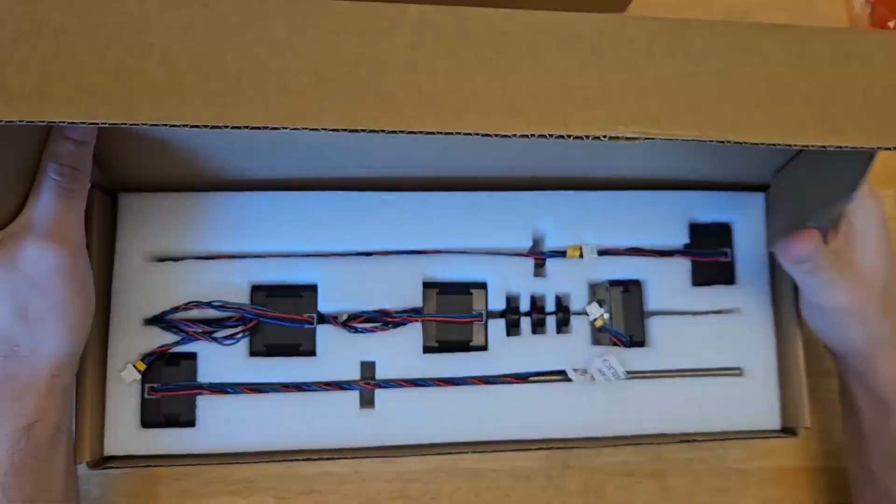Most parts are shipped in categorized boxes. I figured my best course of action was to separate each of these boxes, then open each and sort the bags inside. It's all nicely labeled, so it was easy to sort the X-axis, Z-axis, electronics, Y parts, and so on.

I built a Mark III kit years ago, so I'm familiar with the basics, so I skipped over the beginning of this instruction manual. Now we're onto the frame. For each step, they tell you what hardware and parts are going to be used, so I try to get those out in advance.

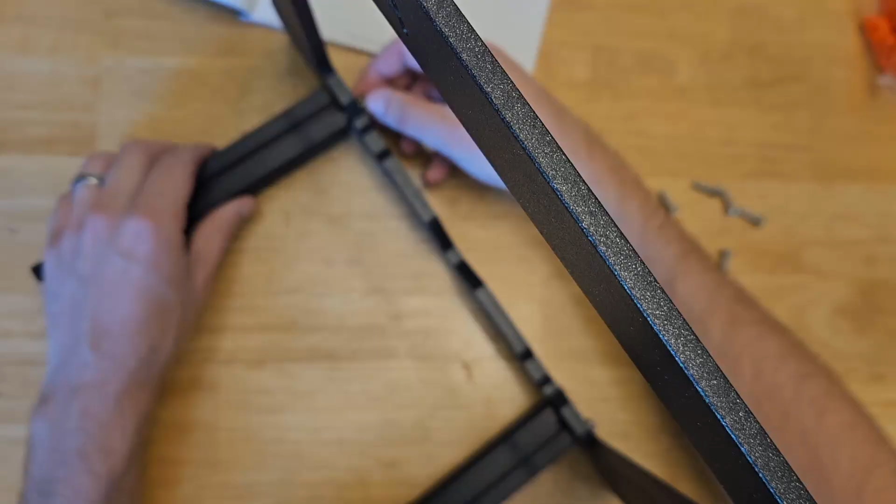The first step is attaching the base onto these vertical frames. I somehow messed up this first step and put these in the wrong spot, so let me take those off and correct them. Now we can get to the shorter legs.

As with almost any assembly, using a star or diagonal pattern is a must. Get all of the pieces mostly tightened, then go back around in a crisscross pattern for final tightening.

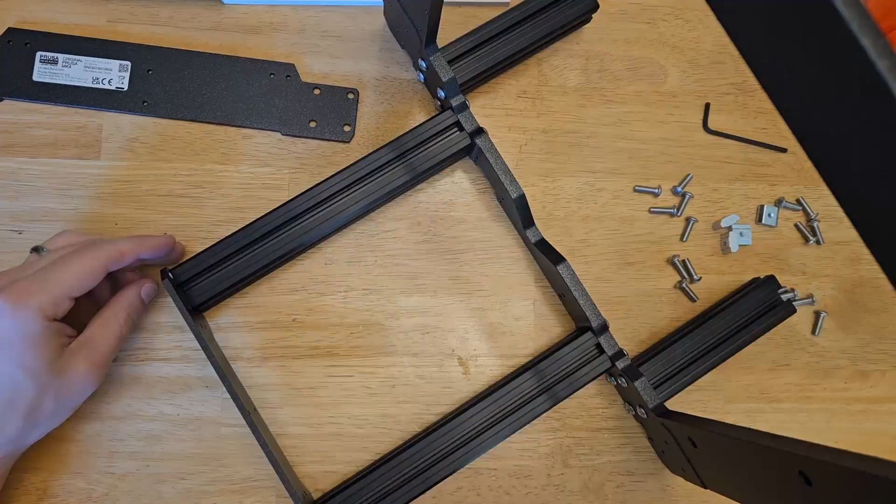The next step is installing square nuts that slide along the side of the extrusions. They only fit in one direction, so they're easy to slide in. We can then go ahead and add the end plates - the short one and then the long one.

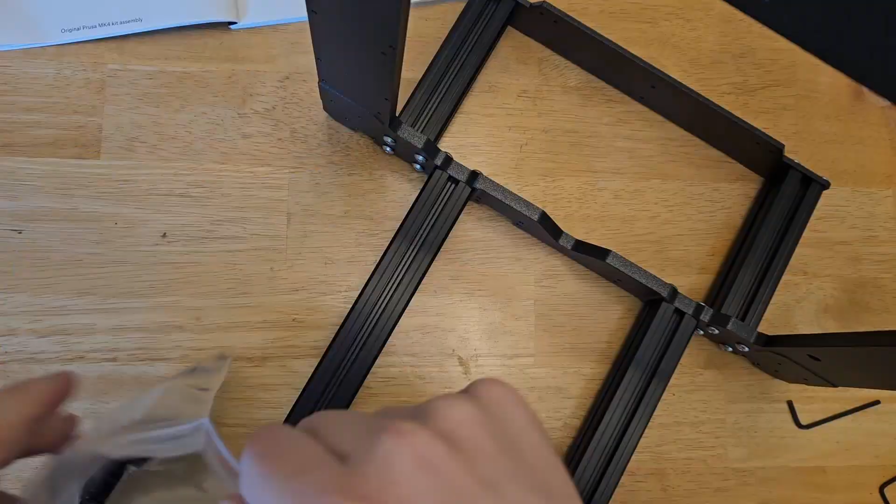Up next are some rubber feet, which should help dampen some vibrations. We push them into place and rotate 90 degrees to lock them in.

These cable clips are next, and man, they gave me a hard time. It's much nicer than zip ties, but I really hated these. You put one side in place and then press hard, like really hard, to snap the other side into place. I'm guessing one of the reasons I hate them is because, even though we've just barely begun, I've already made another mistake - I put these on the wrong side and had to take them off to redo it. Luckily, the pictures in the guide helped me catch that pretty quickly.

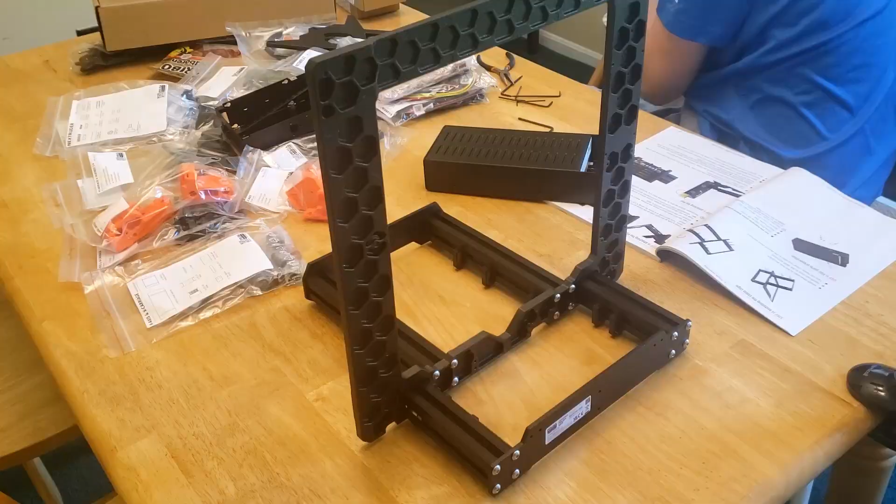From here, we add the PSU. Some screws get added to the sliding nuts we put in, and then the PSU slides into place over top of them. It can then be screwed into the vertical frame and tightened down, both from the frame and from the sliding screws.

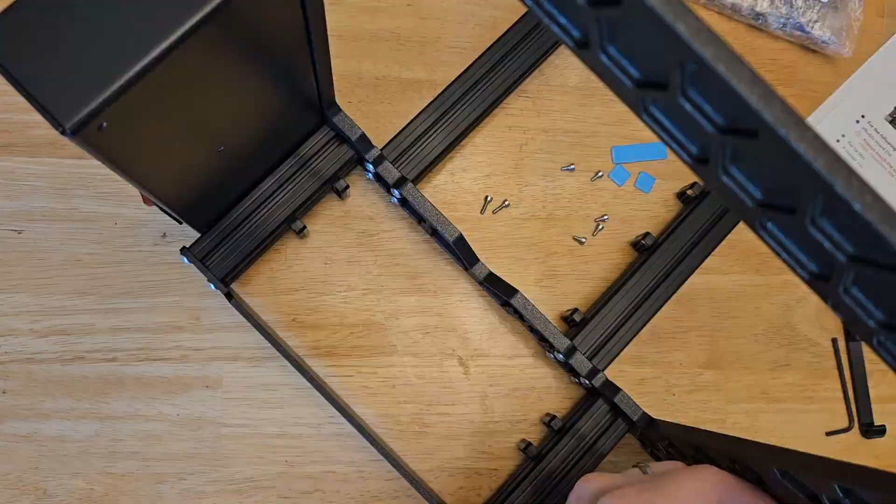Next is the so-called xBuddy box that holds the xBuddy board, or the main circuit board. We begin by installing the box to the other side of the printer, basically the same process as the PSU, where you put it on the sliding nuts and then screw it into the frame.

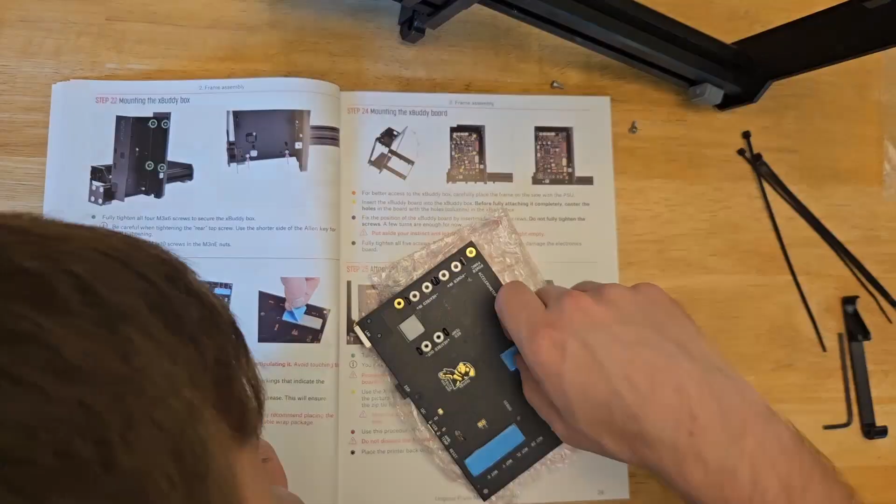We can then add some thermal pads to the back of the board, flip the printer on its side, and place the board down in place. It then gets attached by 5 screws.

At this point, we get out the X-axis holder, which is used later in assembly. It was designed with a special curve to help guide some zip ties into position around the buddy board. While we don't really need the zip ties until quite a while later, I guess they figure you might as well add them now.

As a side note, our cat loved playing with them while I was between build sessions because they're just sort of sticking out the side.

After getting the printer back upright, we can look at the Y-belt idler. We push a nut into position and then we screw it down to the frame.

We then move to the Y motor. A few nuts get pushed into the motor holder, and then the holder gets screwed to the motor. From here, we attach the drive pulley.

Using an Allen key, we can place the pulley at the right spot before tightening the grub screw. As a warning, I actually had this pulley flipped upside down, and I'll fix that later.

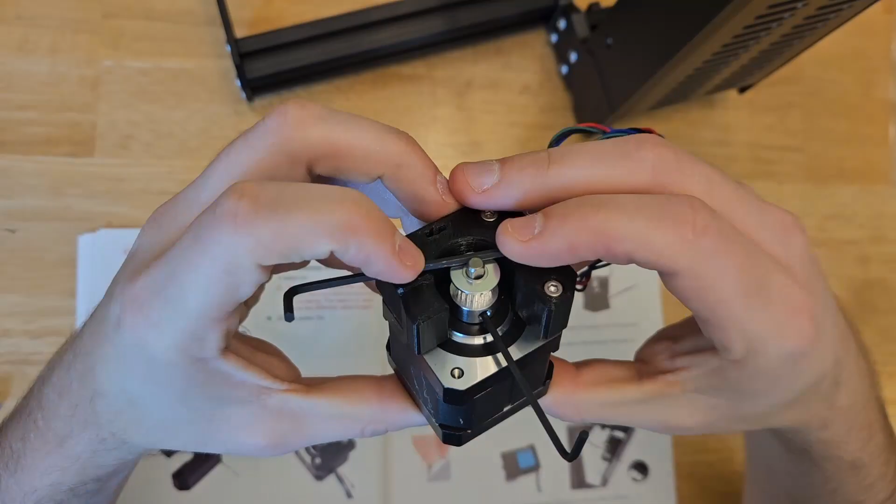With the thermal adhesive in place, which I assume just acts as a shock absorber, we can screw the motor into the frame. And there we go. The frame is basically done. In total, that took about an hour and 40 minutes.

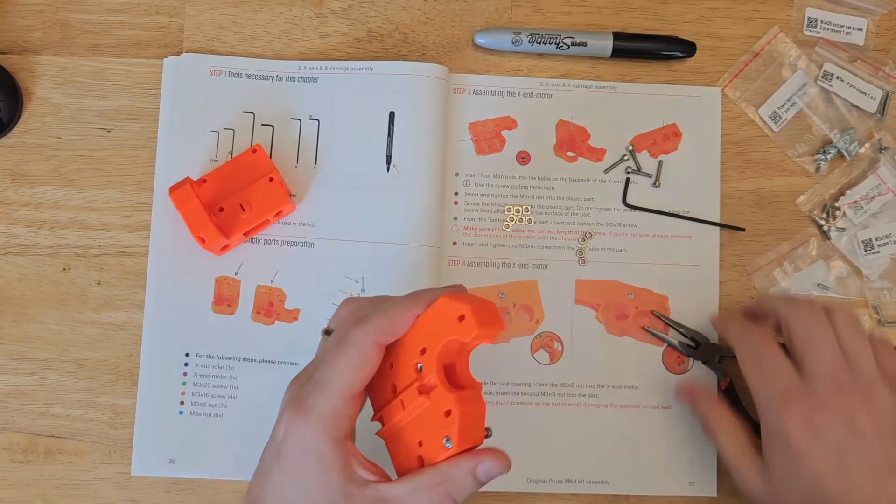With the frame fully assembled, we can now hop into the X-axis. We begin by getting the X-end idler and the motor mount. These have a ton of nuts that need to be inserted. By this point, you're hopefully pretty used to the various techniques to use to insert them.

Now let's get out some bearings and their clips. The bearings in this kit need to be lubricated, so there's an included tube and some adapters. Here we're going to use the larger black adapter. It screws onto the tube, is pushed into the bearing, and rotated into position so that it pushes lube out of some tiny channels onto the ball bearings.

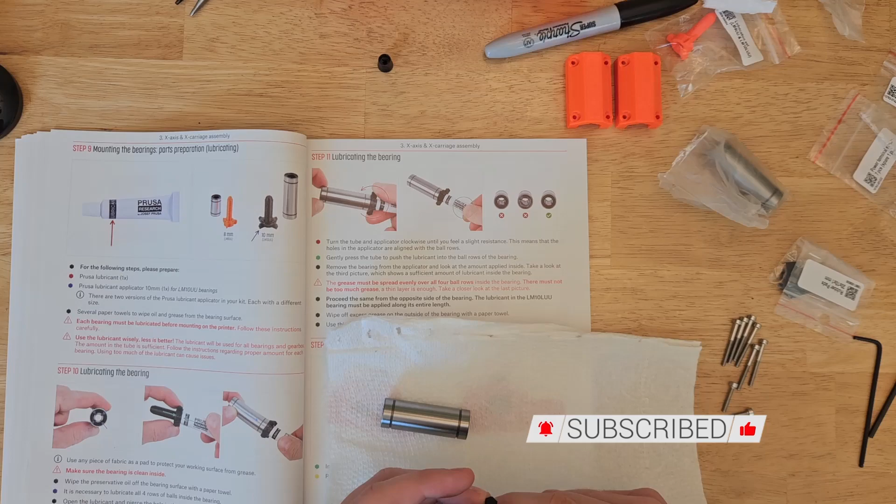It seems to work okay, but it's not really the most elegant process. I feel like this is something that could probably be improved in the process later.

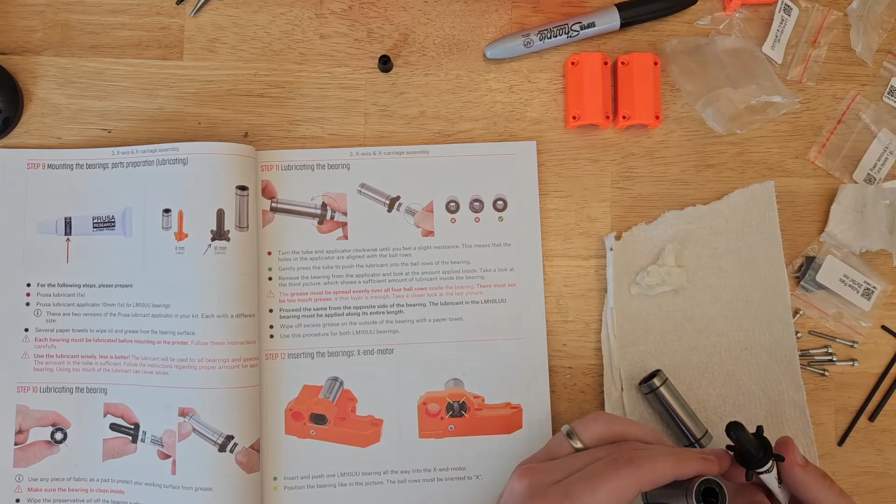After doing this for both bearings, we look at clipping them into place. We place it in the motor mount and rotate it so that the ball rows are aligned properly, and then a rubber pad is put in this cover to help the bearing from rotating. The lid is then slid over the bearing and tightened down. As usual, it's tightened in a diagonal pattern.

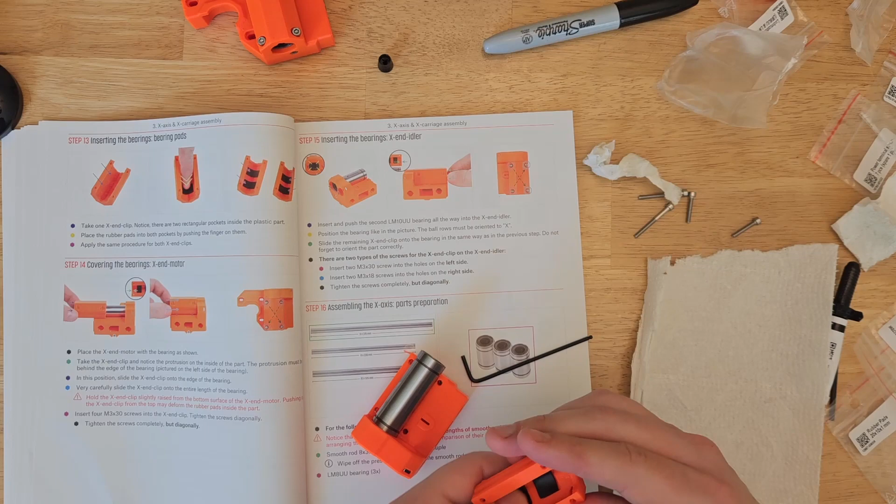This process is then repeated for the X-idler mount. We put the bearing in place, get it oriented properly, slide the lid over, and we tighten it down with the X pattern. Next up, we take the 2 longest steel rods and 3 of the shorter bearings.

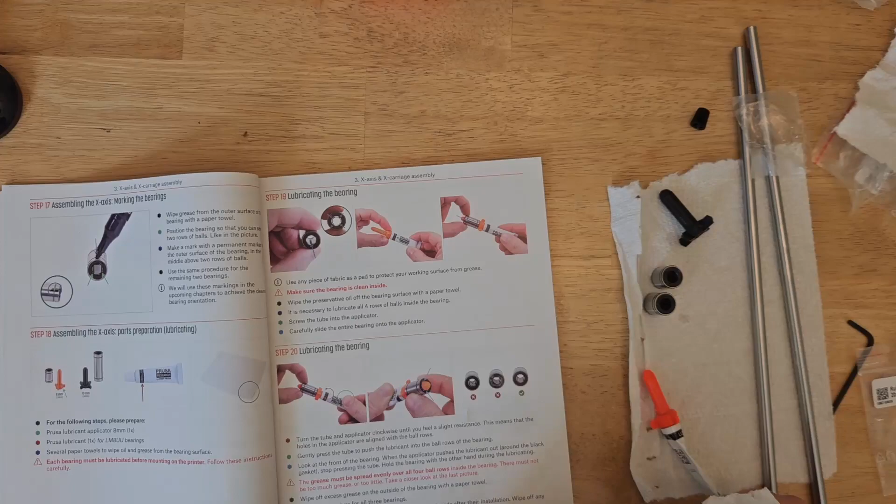These get marked to help us remember the orientation of the ball bearings. Then, basically just as with the previous bearings, they get lubed up, this time using the smaller orange adapter. We can then push the 2 rods into the X-end idler.

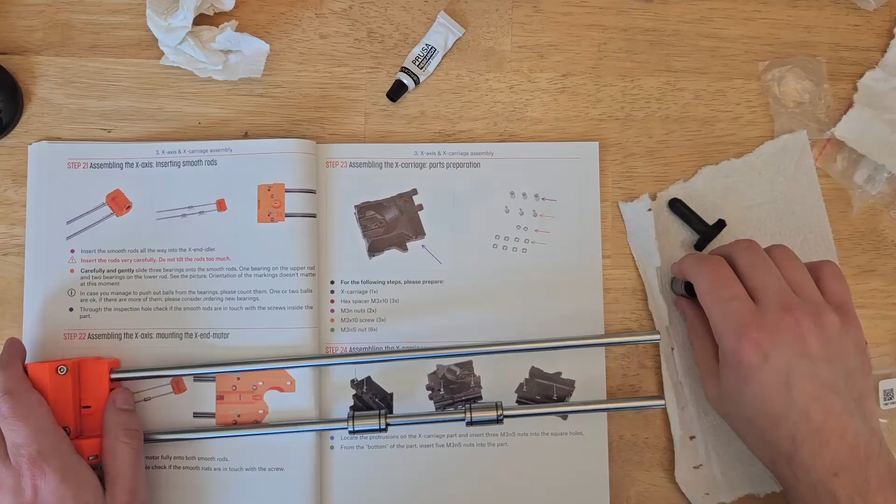It takes a bit of force, but pushing on the table worked out pretty well. The bearings are then slid into place, but make sure you note the direction and orientation, like you put 2 bearings on one side and 1 bearing on the other. And with those on, we can slide the X motor mount onto the other side of the rods.

For now, the X-axis can get set aside and we move to the X-carriage. Again, we have a ton of nuts that need to get embedded in this one. Just use the Allen key with various push and pull methods to get them in place. And after that, we'll add a few hex spacers as well.

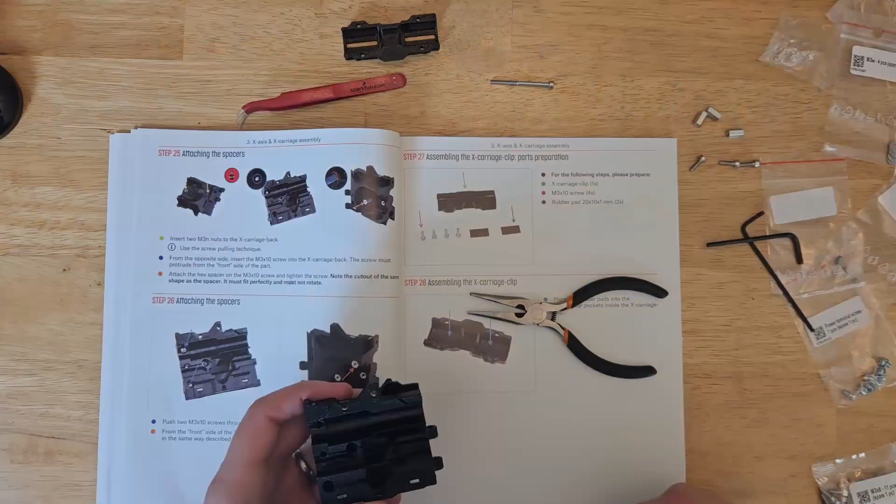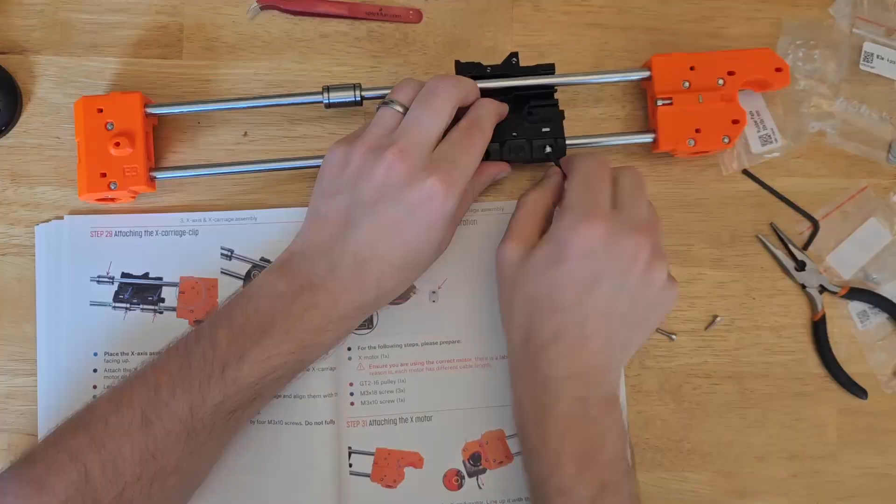The carriage clip is next and receives a few rubber pads. Just as with the other pads we use, these will help hold the bearings in the right orientation. With those pushed down into place, we'll spin the bearings so that they're lined up properly, and we'll put the cover on to tighten the screws.

Next, we grab the X-axis motor. This gets mounted to the motor mount, similarly to the Y motor. Use the Allen key to align the pulley, and then tighten down the grub screw.

From here, we get the idler pulley and the X belt. With the belt wrapped around the pulley, we can pull the pulley into the idler and slide and push a pin through it. Man, I said pull and pulley a lot there. By pulling on this belt, the pin seats into place.

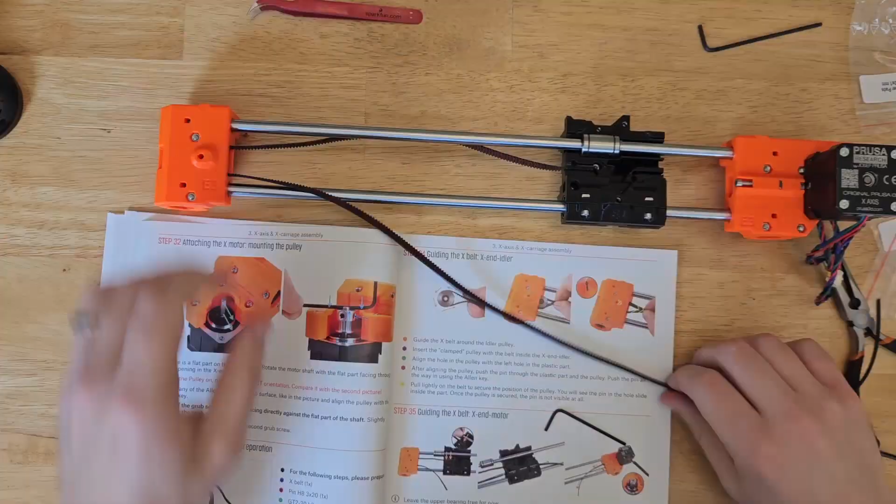Now we'll push one end of the belt into the carriage. I like to use an Allen key to get it fully seated in there. The other end gets passed through the carriage, wrapped around the drive pulley, and then back to the carriage. It can then be pushed into place.

Don't worry about the tension right now. It should be somewhat tight, but it gets fully tightened later. The last step for this X-axis is to fully tighten the carriage clip into place.

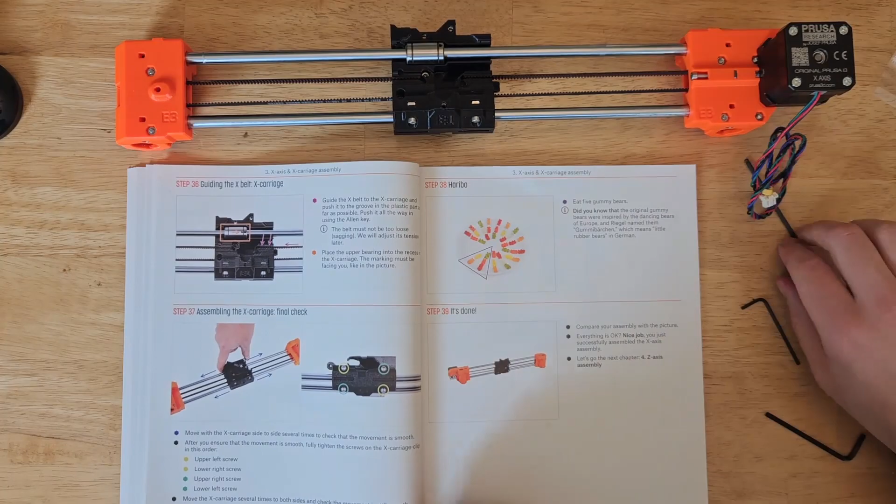And bam, the X-axis and carriage are complete. That took about an hour and 45 minutes, bringing us to a total of 3 hours and 25 minutes. With the X-axis all assembled, let's go ahead and start grabbing some parts for the Z-axis.

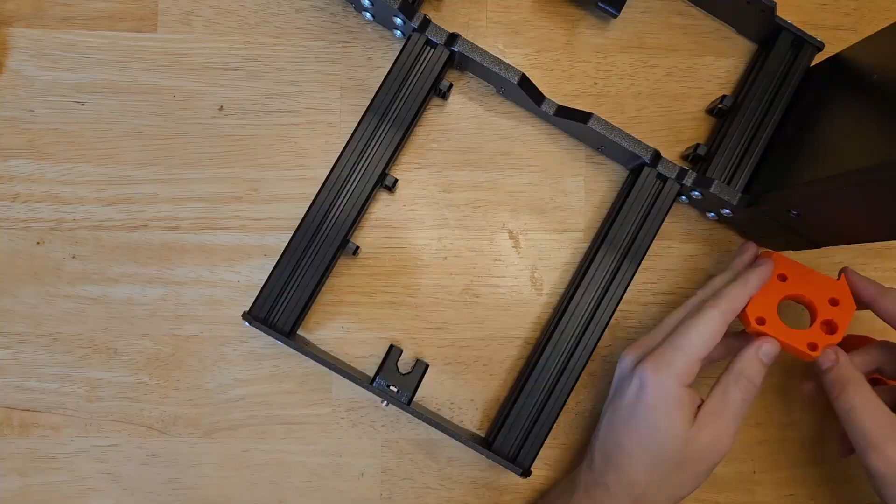We're going to start with the bottom left and right brackets. Using a few screws, we'll screw them into place. There's a little lip on the side to help ensure that they fit into the right spot and to make sure that they're on the right side.

Now we can get out the Z motors and the attached screw drives. We'll also need to add some rubber pads at this time. There's a few plastic nuts in this box as well, and they recommend putting them aside so you don't lose them. The motors get mounted to the underside of the mounting brackets.

The longer cable should be on the side opposite of the buddy board. The rubber pads are placed over the motor before we screw them down. At this point, we can tighten them most of the way, but we need to leave a little slack for some of the next steps.

First though, we'll feed the wires into place, under the frame, and up to the buddy box slots. Now those trapezoidal nuts come into play, along with 2 more metal rods.

This time we use the 2 shortest, which are also the largest in diameter. We'll go ahead and push them down into place. There's even a little viewport in the motor mounts to help make sure that they're pushed in all the way.

From here, get the X-axis assembly and slide it down over the rods. The plastic X-axis holder now comes into play, used to hold the assembly up near the top of the printer. With this held up here, we can see how the threaded rods stick up through the X-axis brackets. It's up near the top, so any small changes in angle cause a large amount of movement.

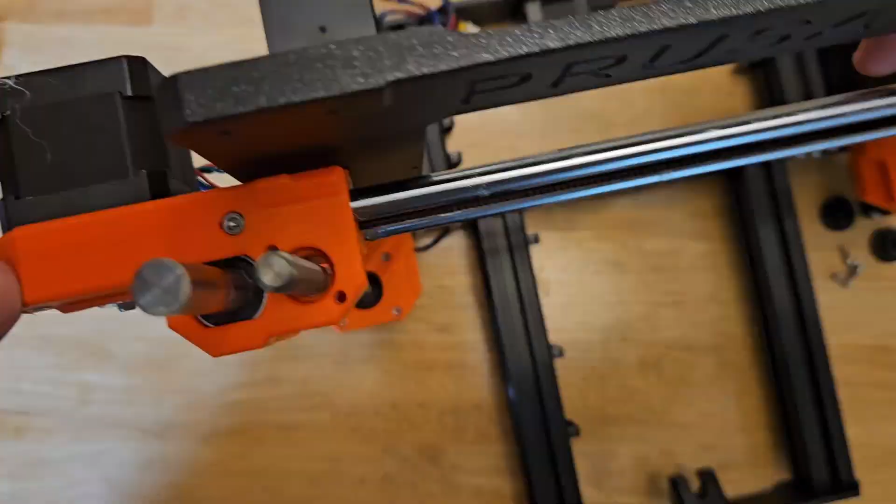This gives us the opportunity to tighten the Z-motor screws. We want to get them nice and tight, but we may need to back off slightly on some of them to ensure that the screw is centered in the hole.

We can now move on to screwing in the trapezoidal nuts. They screw onto the threaded rods and down into the holes on the X-axis assembly. Tightening the screws down on these nuts now locks the Z-axis height to the X-axis assembly.

So really, we can remove the X holder if we want. I mean, I didn't. I probably should have, but I waited until a little bit later.

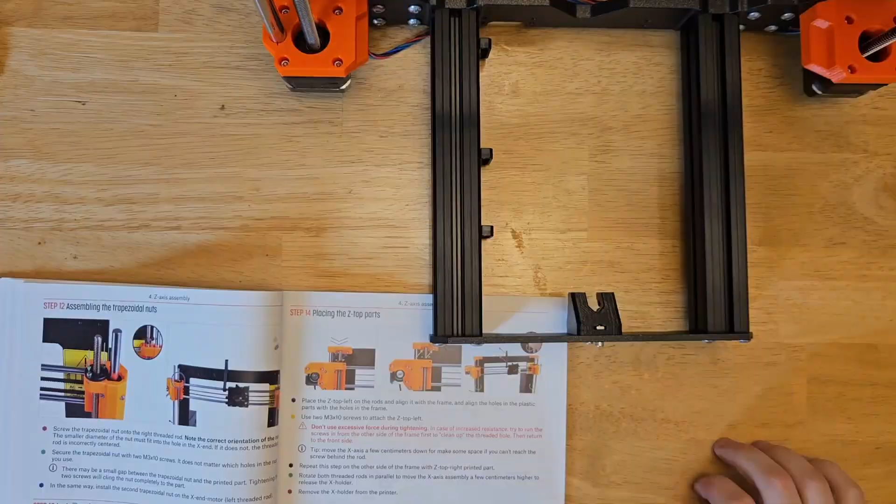Up next, we have a couple end caps that go over the Z-rods. These go over the top and screw into the frame. I had a bunch of trouble with one of these, so I put a screw in from the back to ensure that the frame was threaded out nicely.

Sorry about some of the camera angles. I should have used a wide angle option on the phone, but again, assembly was priority, not recording.

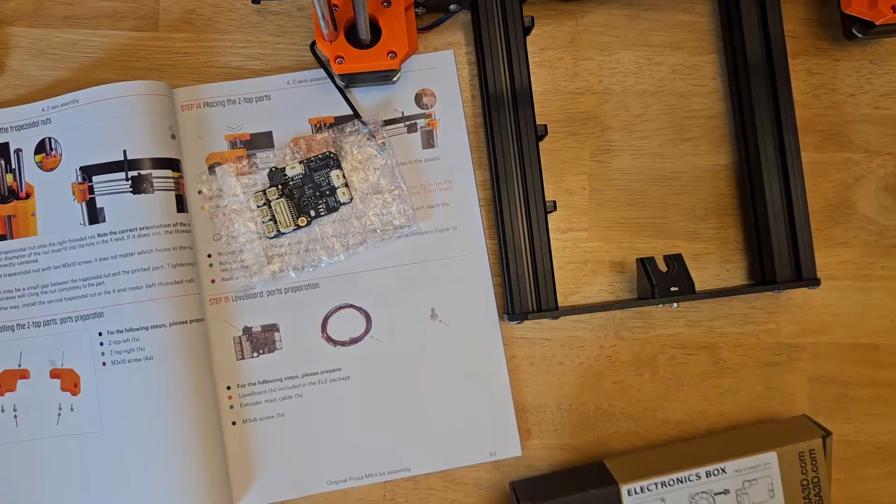With this assembly all in place, it's time to hook up some of the controls for the X-axis. We'll need to go to the so-called LoveBoard, and also this large extruder cable. The cable gets passed through the axis and up into a channel in the carriage.

We then plug it into the LoveBoard, and then we push the LoveBoard down to its slot on the carriage. From there, it gets screwed into place, and I do a bit of cable management.

Okay, so now we want to set up some parts so that the cables can feed from the LoveBoard down to the buddy box. We start with a large screw going through this cable holder.

Next we grab the nylon strand and this back cover. We'll go ahead and place one of the rubber pads onto this back cover, which will prevent the bearings from rotating. And now the nylon gets pushed through the little hole to hold it in place.

After ensuring that no wires are pinched, the back cover can be screwed on and that bearing can be held into place. I didn't quite have one of the inserted nuts on the carriage pulled in all the way, so my screw didn't quite reach. Luckily, I could just use one of the longer ones to pull it tight, and then go back with the correct screw.

From here it's a part I always hate for some reason, using the cable sleeve. We'll use the largest of the three cable sleeves and wrap up this bundle of cables. After getting it started, this cover gets placed on and zip tied down. Spoiler alert, these zip ties gave me some trouble later. Make sure they're tight and rotated properly.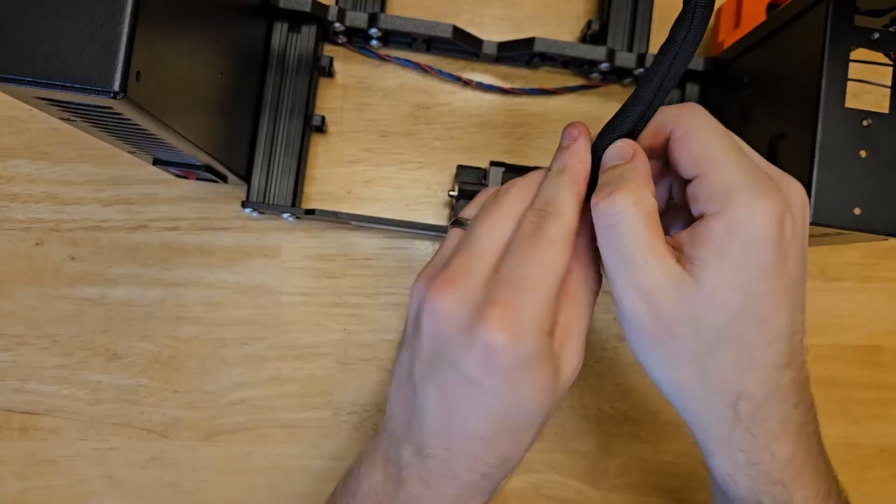So from here we just finish wrapping up the sleeve, and after grabbing a few other parts, it's time to wrap up the X motor cable, which is much shorter and easier.

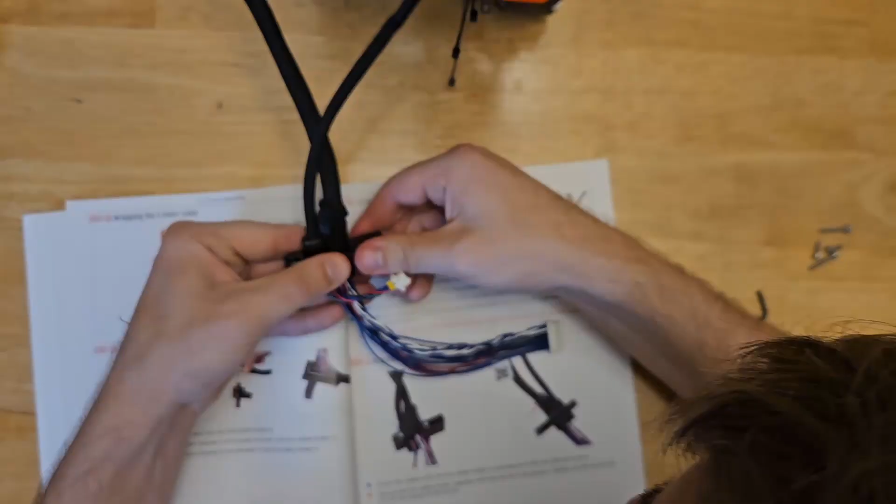Now it's time to move on to this cable holder that brings the newly sleeved cables together. We'll push a few nuts in, then use the nylon to lock the larger bundle into place. Next, the smaller bundle gets passed over top and placed in its spot. From here we can screw down the top of the cable holder, which clamps down on the sleeves and keeps everything in place.

A zip tie is then used to clamp down further on one of the extensions, and honestly I'm not entirely sure why that was needed. But now we can slot this into the xBuddy box and tighten it down. The cables are left unattached for now, and with that, the Z-axis, and I guess the X-axis wiring, are completed.

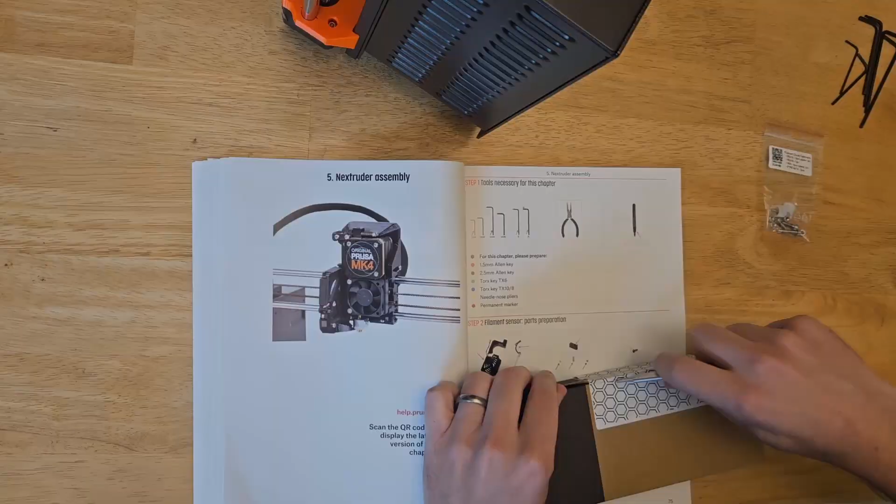That took another hour and 45 minutes, bringing us to a total of 5 hours and 10 minutes so far on the build. Alright, with the X-axis and Z-axis all assembled, we can begin on the Nextruder. The printer can be set aside for now, as we'll be focused on this sub-assembly for a little bit.

We start with the filament sensor assembly. I wasted so much time here searching for this steel ball, which turns out it was just in a different bag than what I was expecting.

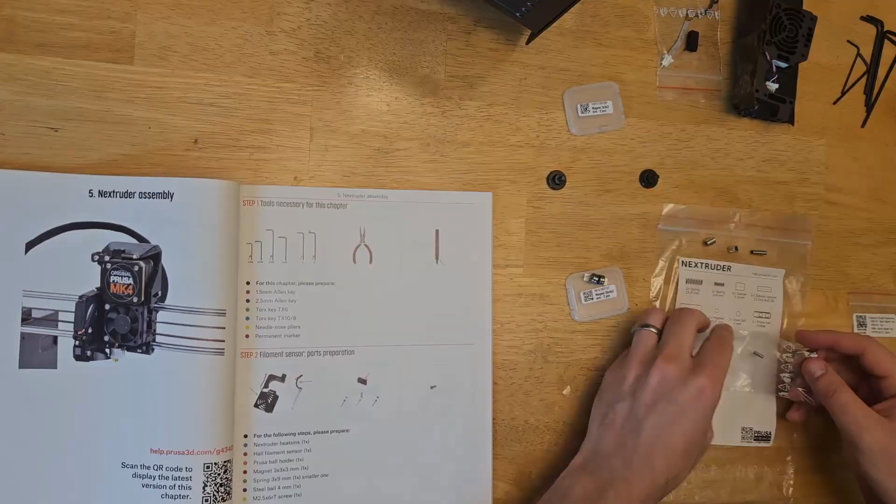Okay, so with all the parts in place, this filament sensor gets screwed into place on the heatsink. We can then assemble the spring-loaded ball that assists the sensor. The ball gets stuck to a magnet, which then gets put on the spring. This assembly is then pressed into a slot on the heatsink.

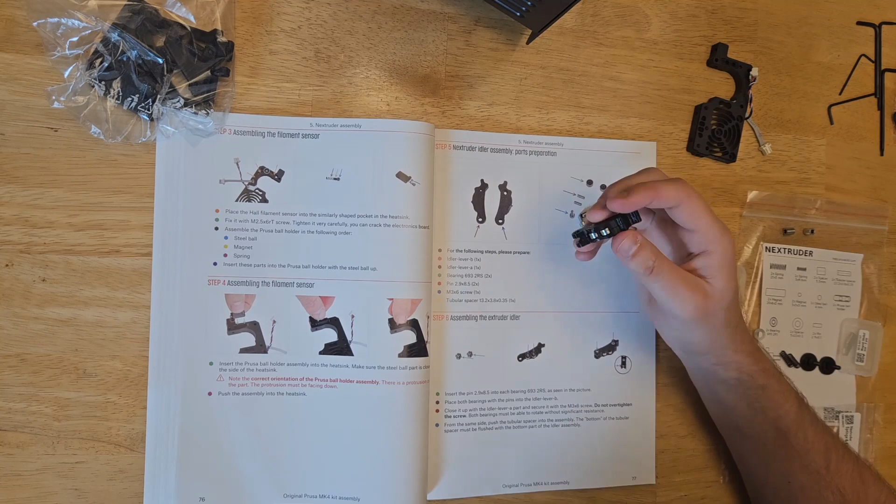We can set that aside for now and start grabbing parts for the idler assembly. This is just two small bearings that get sandwiched between the two halves of the idler lever. When tightening it down, we need to make sure the idler bearings can still spin freely, so don't go too tight. The spacer then gets pushed on one end, which will basically act as a pivot later.

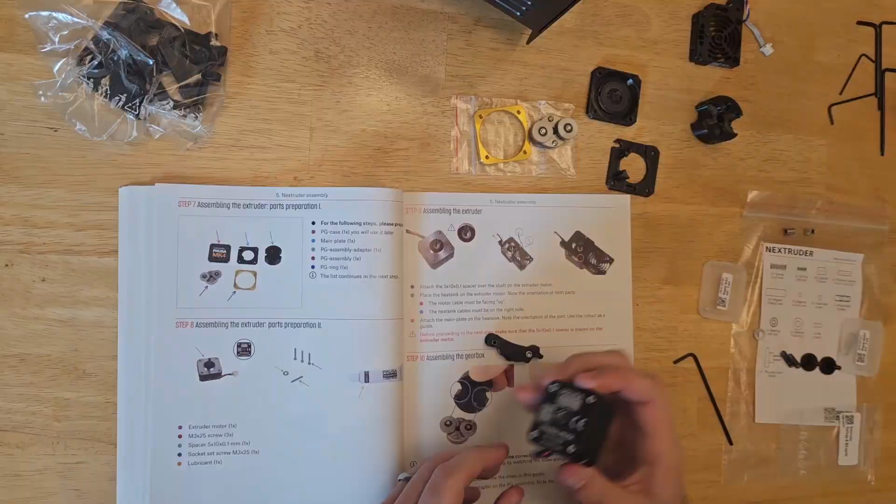Okay, so now the main extruder part. We'll need the planetary gear, the housing, and the motor. The heatsink gets placed on top of the motor, and then this plate gets set on top.

We can then take the planetary gearbox assembly adapter, and we use that to pick up the gearbox. The adapter is basically just a specialized printed part to help with alignment. With it picked up, we can now press it into place.

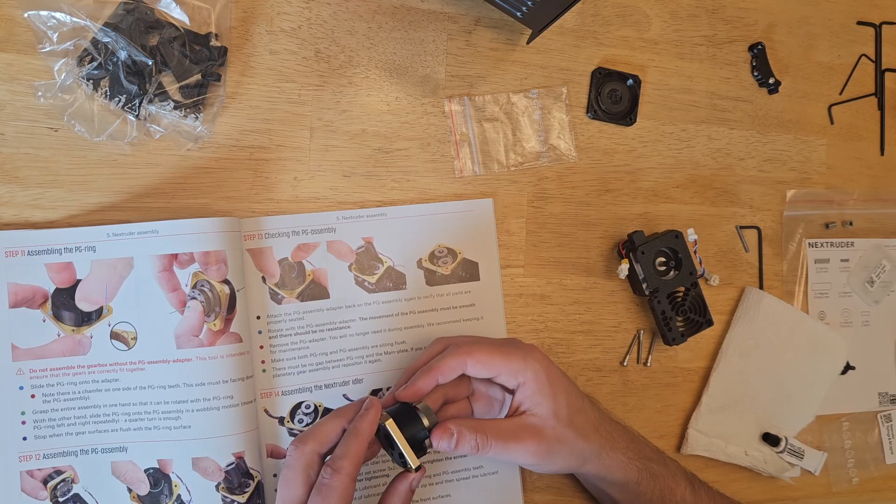This step also took me much longer than it should have. I was just trying to be overly cautious, I think. Also, the lighting I was in made it really hard to see the chamfered edge on the ring, and I feel like they probably could have marked that ring a little bit better.

Eventually I got it on, about 10 minutes later, and I placed it on the motor. The guide was adamant about making sure it was aligned properly, so I actually took it back off and did it again just to be safe.

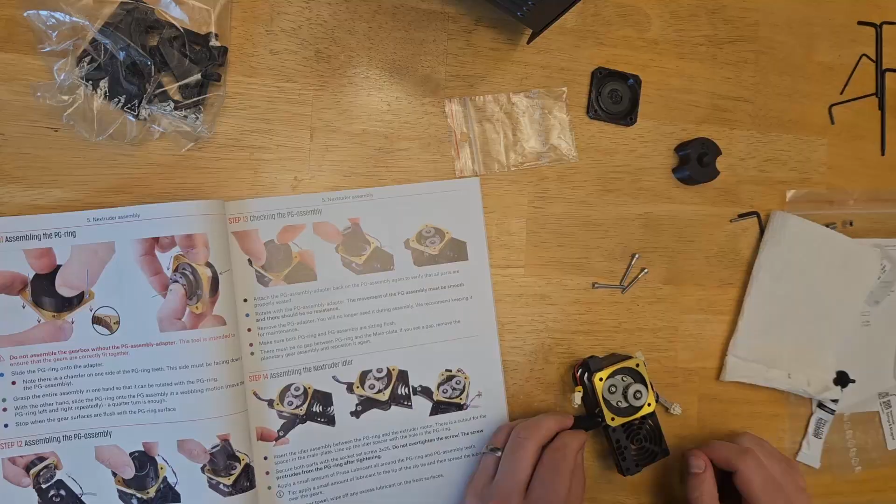From here, the idler gets added and the screw is inserted. Next, it's time to lube up the gearbox. I used one of the small Allen keys, but it actually recommends using the tip of a zip tie. Basically, just go around all of the teeth of all of the gears.

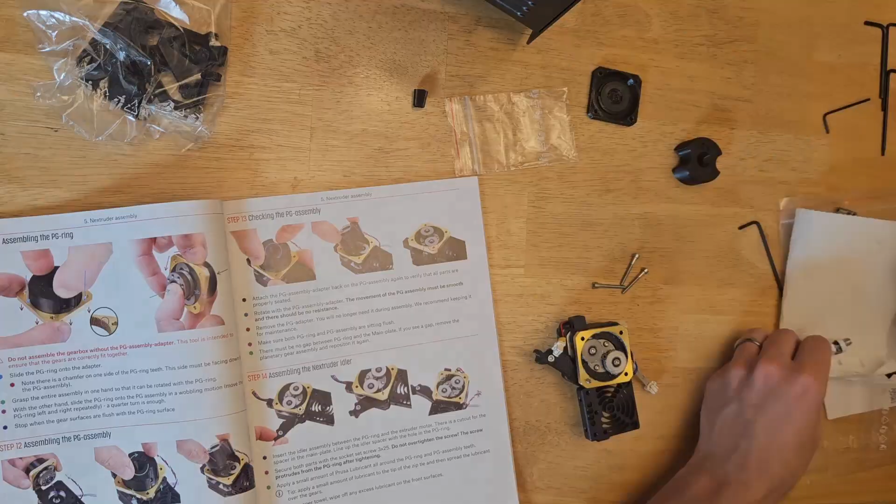We can now take the gearbox cover and screw it into place to close things up. I saw an idea online about printing a clear cover for this, and I really wish Prusa had done that by default. They made such a big deal out of this Nextruder assembly, and then they cover it up. Oh well. We can put this assembly to the side for now and move on to the other half of the idler.

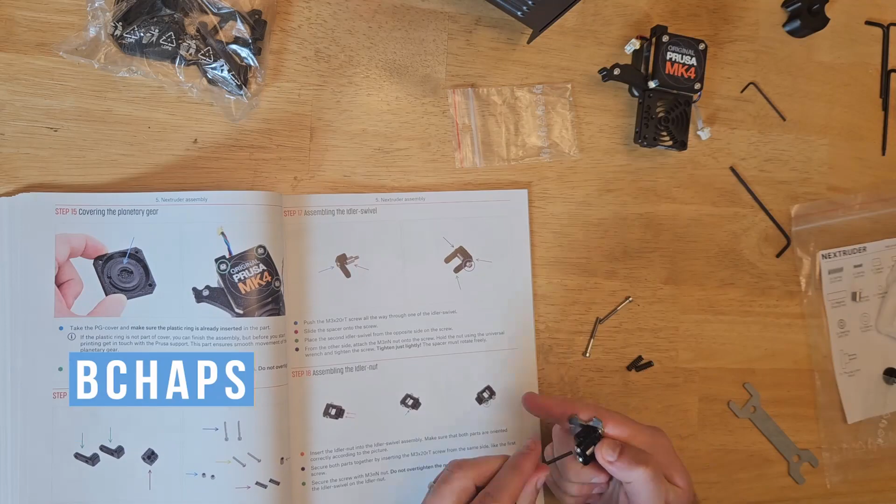We'll get a bunch of tiny little pieces here and attach them with some spacers in between to make a swiveling part. And as with any swiveling part, just don't over tighten it or else it's not going to rotate.

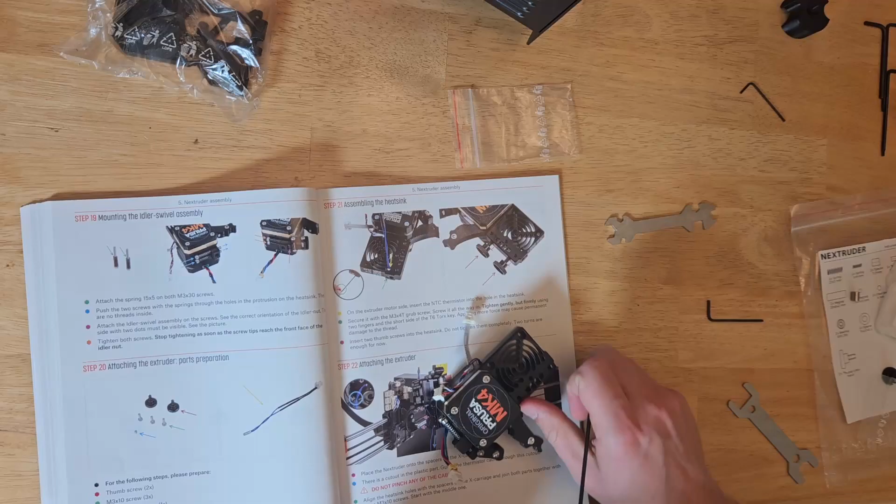We can now take the springs and put them on the screws, push them through the motor bracket, and screw them into the idler. It's hard to gauge how tight these are due to the spring's resistance, but the instructions say to tighten until just the tip of the screw reaches the front of the idler nut.

From here we can start preparing to attach the heatsink and prepare for the nozzle. The thermistor gets attached with a single grub screw. We'll also put 2 thumb screws on which will hold the nozzle in place. This whole assembly can now be placed on the X-Carriage, and with 3 screws, it's now in place.

With this all together, we can take some time to do some cable management. There's a channel on the carriage that we'll use to guide the cables up so that they don't get pinched.

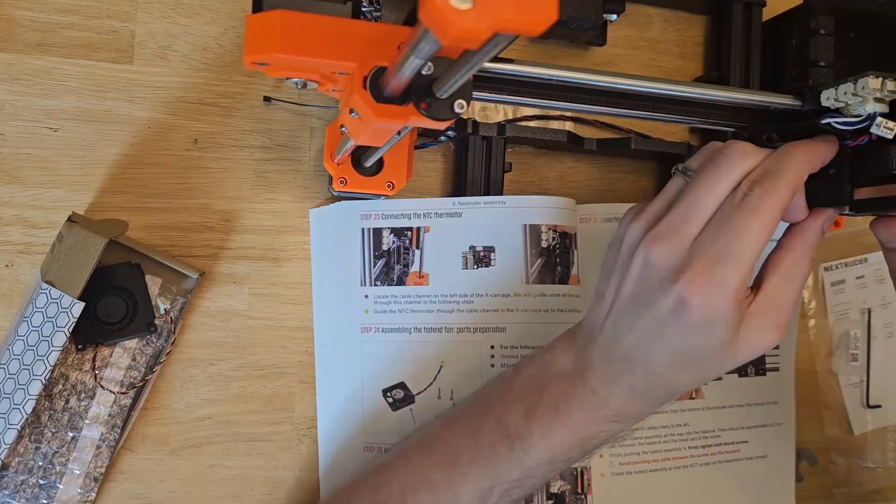Now comes the hot end fan. It gets 2 screws to hold it in place, and then the cable gets fed up the LoveBoard and plugged into its labeled slot. The nozzle and hot end assembly is next, which is a cool change from the previous designs.

This just slides right up into place and then gets secured by tightening the 2 thumb screws. Once secured, we'll do a little bit more cable management, feeding stuff up through the guide channel.

This next step is assembling the hinged print fan assembly. There's 2 small magnets, one of which gets pushed into a slot on the fan door. The fan door then gets laid down and the fan cable sits nicely into a channel on it.

Folding the fan over clamps the cable down into its channel, and we can secure it with a couple of screws. Next, the fan shroud goes into place, which is what will direct the air towards the printed part.

As I started tightening this, I realized that the cable was actually getting sandwiched a bit and wasn't properly seated in its channel, so I just unscrewed stuff, reseated it, and screwed it back together.

From here, we take the other small magnet. It gets a little mark to indicate which side is attracted to the fan door, and then it gets pushed into place on the X-Carriage.

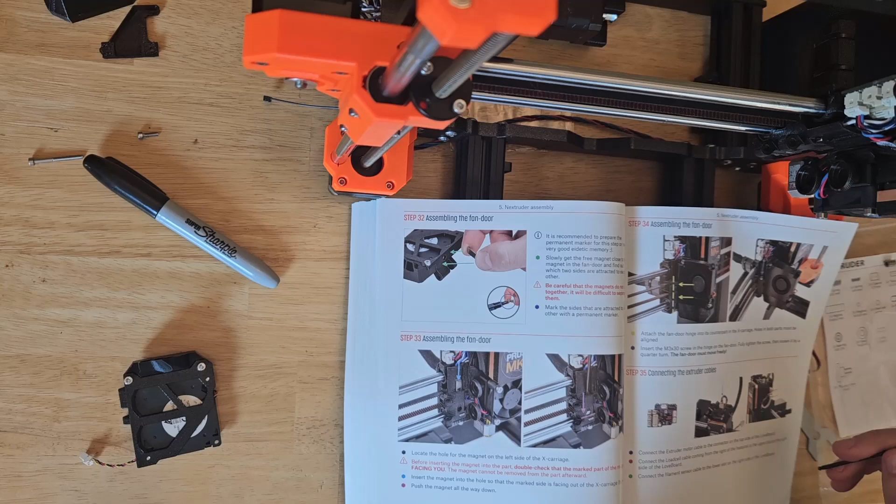I ended up using an Allen key to push it further down to make sure it was fully seated. You really want to use that mark, because if you happen to get it turned around backwards, I don't know if there's any way to really get it back out.

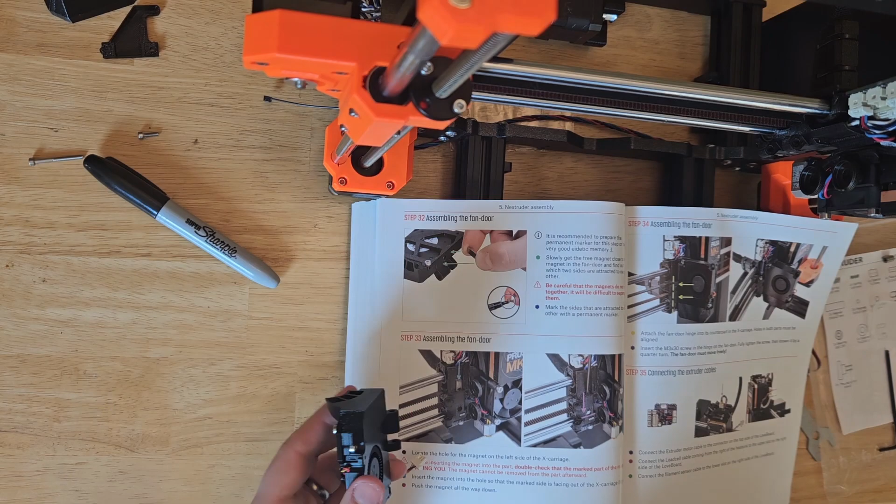The fan door then gets put in position by aligning the hinges, and a screw is used to hold it in place. The door now swings freely, and the magnet will help keep it closed. I did notice a bit of resistance from pushing against the cables, but it wasn't too much of an issue.

Speaking of which, the extruder cable and the filament sensor can now get attached, as well as the print fan cable. The idler is now locked into place, which was honestly really satisfying.

All that's left now are a couple of covers. We'll start with the right side LoveBoard cable cover. I hate this part. It's just held by 1 screw, and I really don't like the way it's seated or the tolerances with it. It probably doesn't help that I thought it was the cause of some of my issues later on, which it ended up it wasn't, but I'm still not a fan of it.

After screwing that on and cleaning up some of the cables, the LoveBoard can be slid down into place. There's some pretty tight tolerances here, so I'm also not too fond of this one, but it is much better than the old design, I guess.

I'll also note that it does seem to flex a bit when I open and close the fan door, due to some of the cables getting pulled.

The final step here is to tune the belt tension. There's a nice app to assist with this. For right now, I just get it close enough. I'm going to tune it more later.

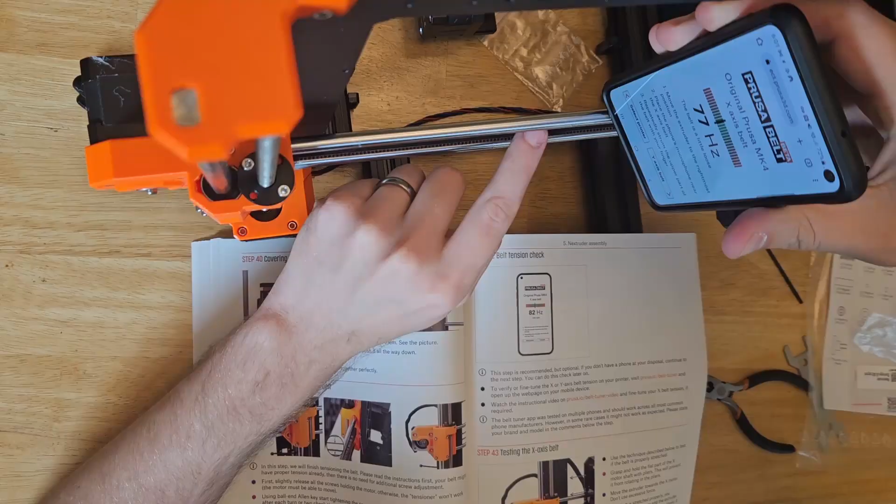With that, the Nextruder assembly is completed. That took an hour and 50 minutes, bringing us to a total of 7 hours even, though we certainly had some inefficiencies along the way that could have been much lower.

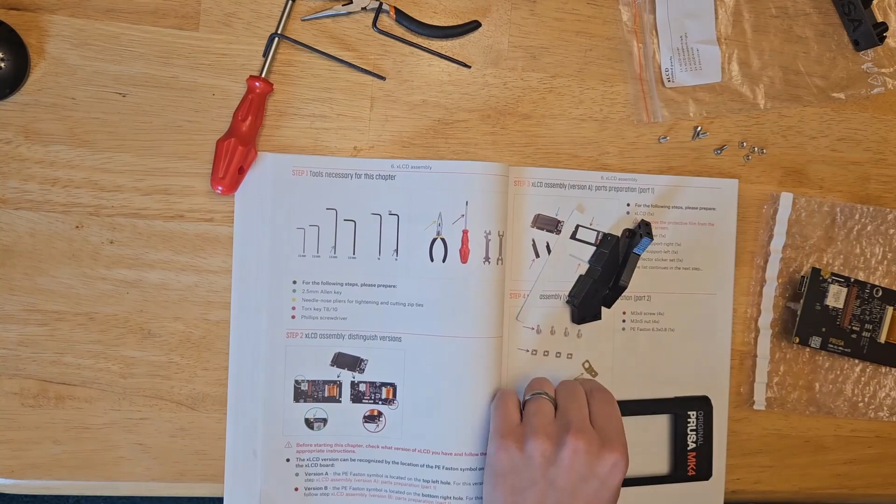Now we're on to the xLCD, which is a nice upgrade from the basic screen of the Mk4. This is split into two sections depending on which screen you have. I have version A, so that's where I'll focus. We start by grabbing a bunch of parts, which makes me thankful for how Prusa organized the bags. The first step is to insert some nuts into the LCD supports.

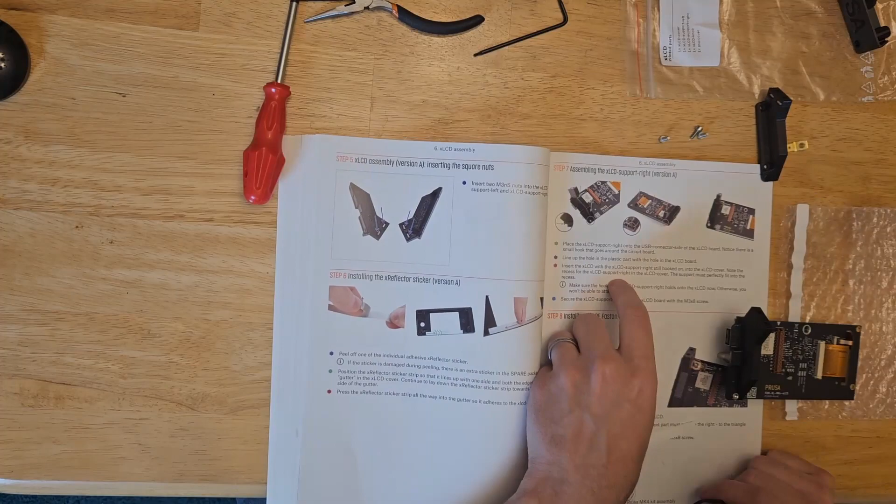We take this xReflector sticker and attach it to the bottom of the cover. The right side LCD support can then get placed on the board and pressed into the LCD cover. The support then gets screwed on.

Next, the grounding cable bracket gets screwed into place, and we can then screw on the left side LCD support. From here, the LCD cable and the grounding cable are plugged into the board, at which point we can skip ahead as the next few steps are for version B of the board.

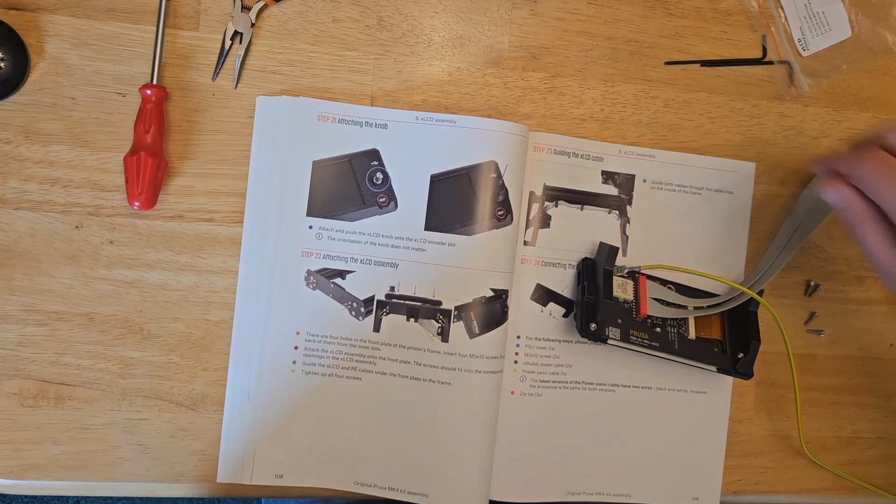The LCD board gets flipped over and the input knob can get pushed on. It's now time to attach the screen to the frame.

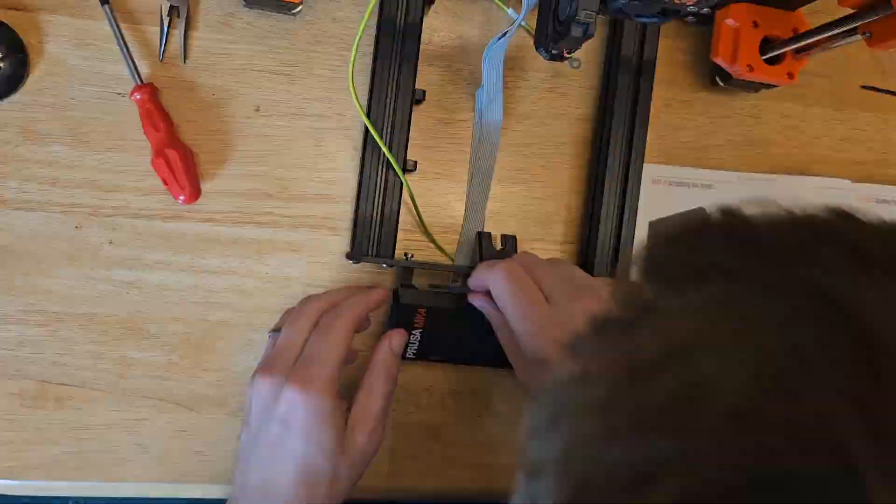We pass the cables under the frame and push the brackets into position. We then come up from the back and use 4 screws to tighten the brackets to the frame. Cable management is next as we feed the LCD cables along the inside of the frame.

We'll now move on to the PSU. This is best done with the printer flipped on its side. Now we go in with some power cables and hook them to the terminal screws on the PSU. Make sure you connect these to the right leads or else bad things could happen, I guess.

We also add this panic cable, which I'm not really sure what it's for, but I'm guessing it's a safety thing. And yeah, give me a break. I have degrees in mechanical and aerospace engineering. All this electrical stuff is like voodoo magic to me, man.

With these wires all hooked up, the next step is to add the PSU cover, which just takes a couple of screws. Then the cables are fed through some of the cable clips to join their friends.

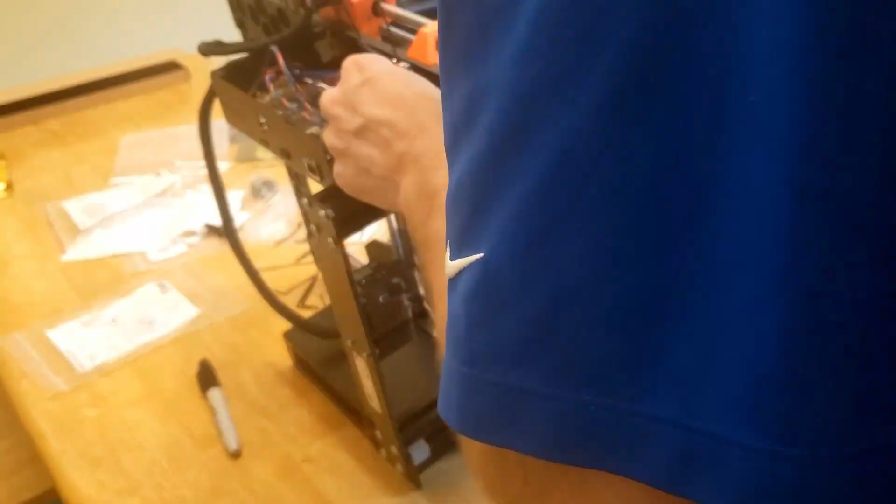With that completed, we can get to the nightmare of cable management in the xBuddy box. It's not too bad, starting with just attaching the PSU and grounding cables.

The zip tie job they want you to do on some of the other cables is a bit odd though, and I certainly didn't get it perfectly the way they wanted. But I guess it's a matter of just being good enough. As long as the cables aren't in the way and aren't dragging on the table, everything should be fine.

I'm not going to walk you through every single cable, partially because there's a lot of them, and secondly because they're important to get right, so I'm not exactly the one you should be listening to about that. And maybe most importantly, you likely don't want to stare at shots of my back for the next 10 minutes.

But hey, look, I got them all in there. And oops, I'm blocking it again. But yeah, there it is. It's all hooked up. Electronics completed.

Well, mostly. This was a short chapter here, but that was an agonizing hour and 40 minutes. That brings us to a total of 8 hours and 40 minutes thus far, which, again, lots of mistakes and inefficiencies along the way. Probably should be a lot less than 8 hours 40 minutes.

So hey, all that's left now is this Y-axis, so let's get started. We start by getting out our heatbed and some of the cables. We'll attach some of these wires and the connectors to their plate.

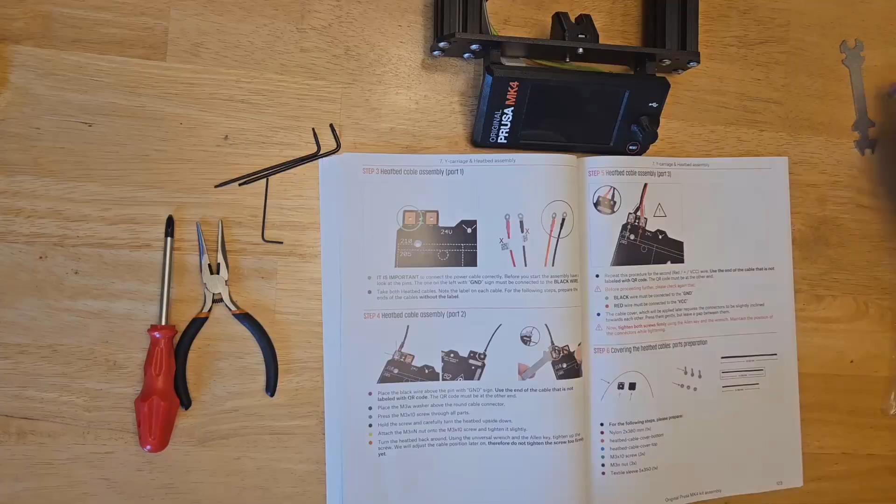They use a wrench from one side and the Allen key from the other, which can be kind of annoying. It makes me wish I had 3 hands, but once it's in place, we can angle them towards each other and tighten it down. Now let's get out some of the pieces and prepare the cover.

It was actually sort of a pain to get these nuts in place. I tried the pull-through method, but I was really struggling. I ended up using the surface of the pliers as a hard, flat surface to press against.

So this nylon gets pushed into a hole in the cover, and the wires are fed through the center hole. It actually took me a really long time, but I eventually got it screwed down. But now we come in with the cable sleeve and get it all twisted up. And let's pop the top cover in to clamp it all down.

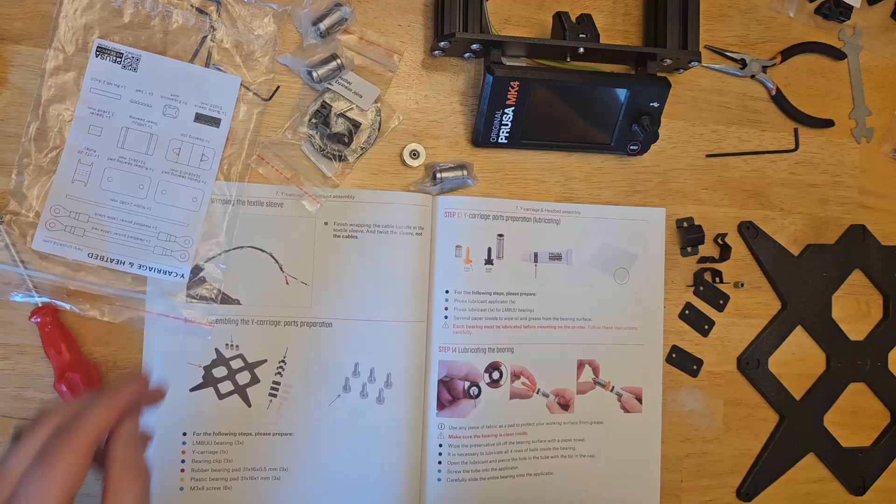We're now pulling out the Y-carriage, some bearings, and some clips and pads. We'll start by wiping off the bearings and greasing them up. So we've done this a few times throughout the process now, and this is the last one, and I'm still honestly not a fan of this greasing process.

I feel like my adapter just wasn't working properly. I think I eventually got enough lube in there, but it seemed like it just was coming out of the bottom more than coming out of the actual holes in the adapter.

So with those bearings out of the way, let's go on and assemble the pads to their clips. We'll start by screwing those into the carriage. The first one was a little tight, but I got it to work.

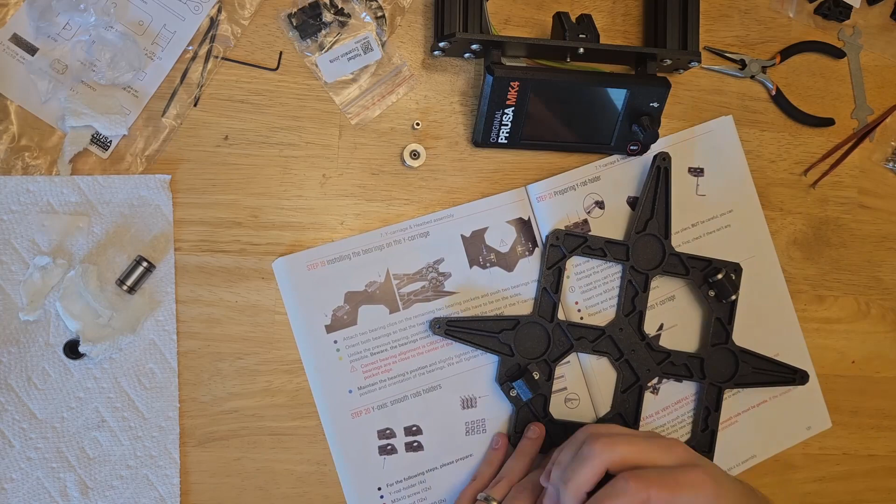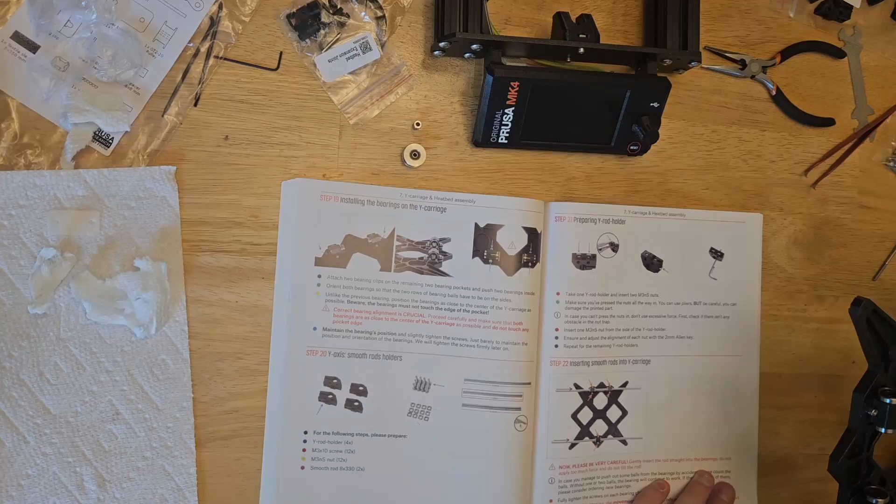This other one on the other side, oh man, this was a pain, and I'm still actually kind of worried about it. I think that the carriage may have not been threaded properly, and I may have ended up cross-threading it. You'll see throughout this I use a couple of screws, take them in and out, I try from the other side, and I even get another Allen wrench in an attempt to stop the slippage. This was a huge pain, but I eventually got through it, sorta.

I took the lazy route as I wasn't in the mood for fixing things at the time, but honestly, if you run into a part that's hard to thread, you should just take the clip off and try a screw by itself. You can do it from either side.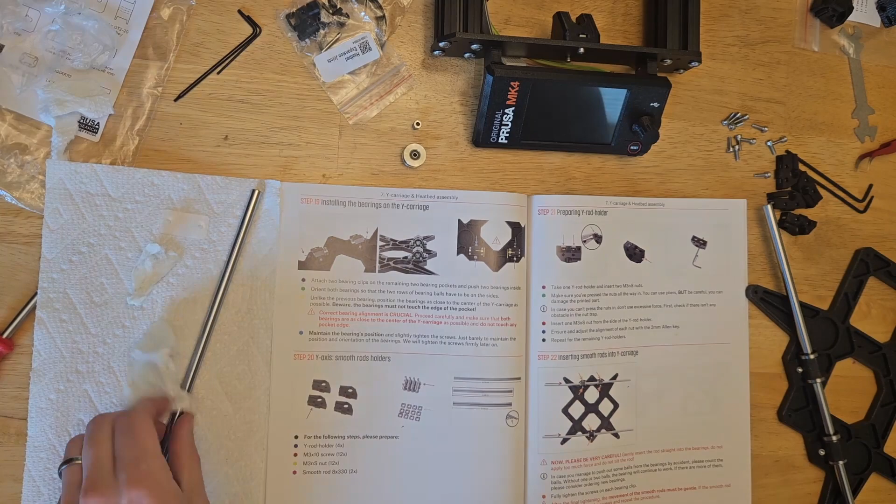Once the bearings are loosely in place, we'll slide the rods on and tighten things down. And again, this is where I ran into some serious issues trying to tighten that one screw down, but I eventually got it, I think, hopefully, and we can then put the carriage on the frame.

We'll loosely attach it on either side, and then the back. And after ensuring everything works smoothly, we'll tighten it down and pinch the holder shut with some extra screws. We can now move on to the belt.

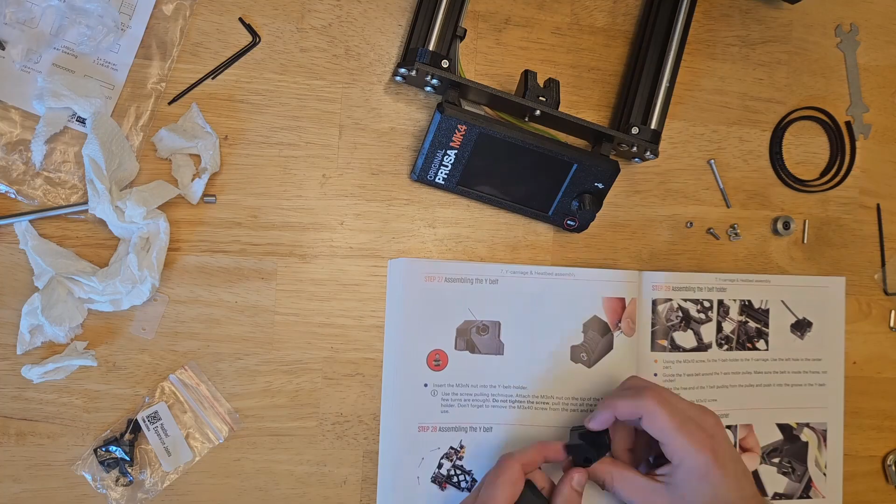After pushing some nuts into place, we'll push the belt into one side of the holder. It's then time to attach this to the underside of the carriage. Next, we're going to feed it through the driver pulley and out the other side.

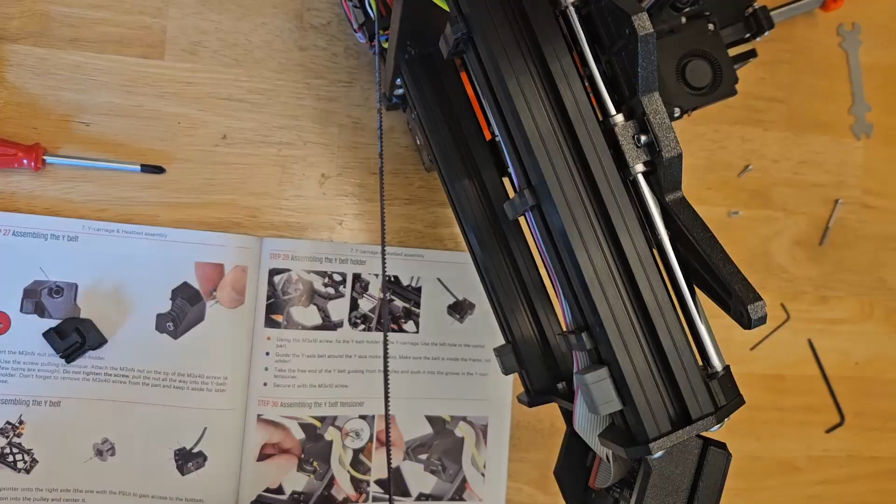We can now attach the belt to the other bracket, and feed the whole thing through the pulley on the front end. This next part was sort of a pain, and it's attaching that second bracket to the carriage. The belt is sort of tight at this point, so it takes some trial and error to get it on.

Unfortunately, even once it was on for me, things weren't quite right. The next step was to look at the belt and ensure it's centered, and mine definitely was not.

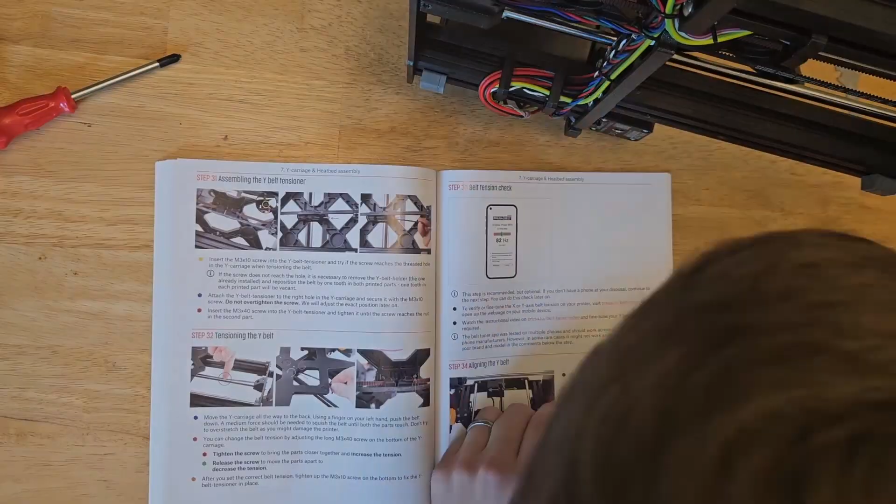I'm not sure how I missed this, but I actually installed the Y motor pulley upside down, thus it's being a little bit off-center. I tried fixing it without taking the belt and brackets completely off, but that wasn't going to happen. I ended up just taking the belt back off, flipping the pulley, and getting it nicely lined up.

From here, we can start getting the heater plate ready. We'll start by adding these expansion joints. Next, we add a spacer followed by the heater plate, which just gets screwed on.

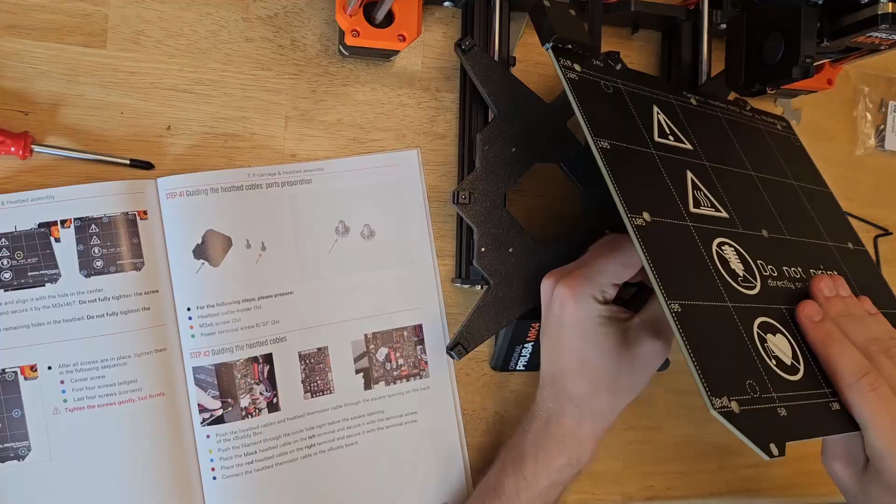So you start with the center one loosely, then go sort of diagonal pattern around the outside, and then go back and tighten all of them up nicely. Now we can move on to the wiring.

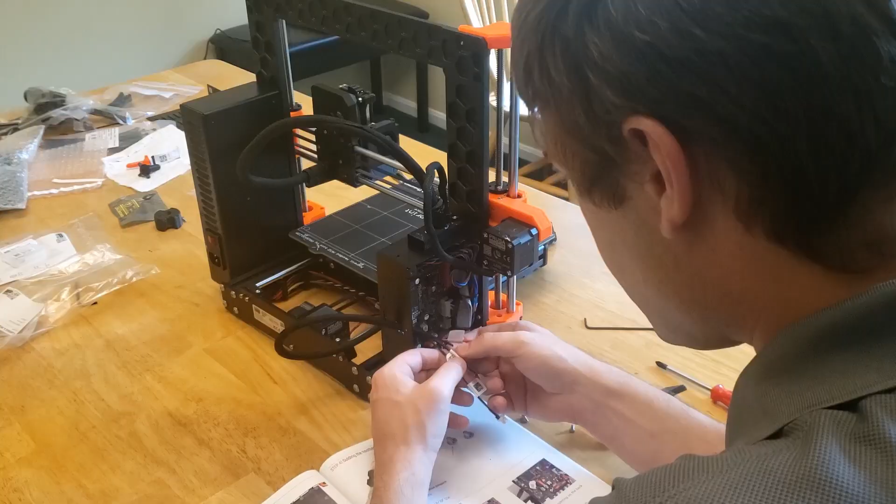The braided cable gets fed into the buddy box and a cover clamps it into place. We can then screw in a few cables and assure that everything fits properly. The Mark IV comes with a Wi-Fi adapter this time, so now is when we can hook that up. Apparently it's pretty slow, but hey, it's better than nothing.

We're almost done with the buddy box now. We'll just put a bottom cover on, then a side cover, and then bam, it's all closed up. The spool holder is next, which honestly doesn't require any instructions to assemble.

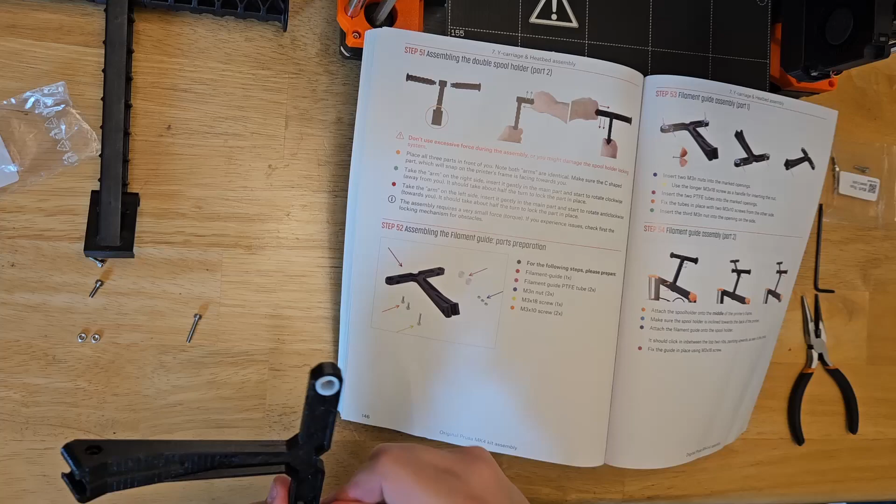The filament guide comes after that, which has a surprising number of parts. There's some nylon inserts, some screws, and then some nuts to hold them in place, and then some screws to hold the guide to the spool holder. It's a nice addition, but honestly, this part was way more complicated than it needed to be.

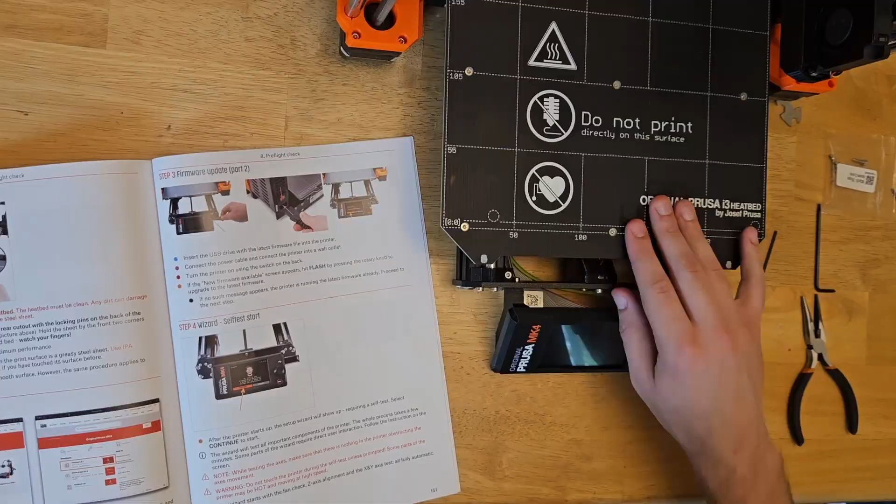And I guess all that's left now is adding the print plate. And bam, 2 hours and 40 minutes later, the printer is fully assembled.

If you've added up all the time so far, that brings us to a total of 11 hours and 20 minutes. I'll say that likely should have been closer to maybe 8 hours for someone semi-experienced and not terrible at this, and maybe 10 hours to somebody who's new and again not terrible at this.

But paying attention to the camera, or at least trying to occasionally, and some of my bonehead mistakes, and me just being straight up terrible at using this Allen wrench, probably added quite a lot of time here. So with that assembled, I'm going to clear out some space and move the printer over to an outlet. And of course, I'll pick up the camera and move that over for you all.

Alright, so here we go, the first boot up. It checks the axes, then wants me to tap the nozzle to confirm that the strain gauge used for first layer calibration is working, and then it checks the fans and heaters.

Then being this is the first startup, it wants to do some adjustments to the Nextruder. I'm not really sure what that's all about, but hey, let it do its thing. So we have to unscrew it slightly, and then let it do its stuff, and then tighten everything back up. Alright, lastly, it's a filament sensor check, and bam, we're done.

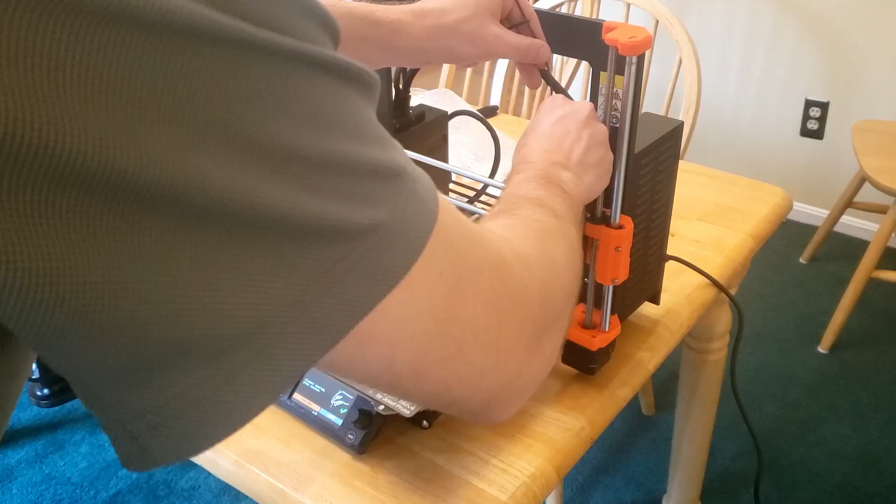Well, except for the fact that I failed the x-axis. Here I go through some troubleshooting trying to figure it out. I thought it was this cable holder, or this cable management thing on the right side of the buddy box, but I fixed that and it still failed.

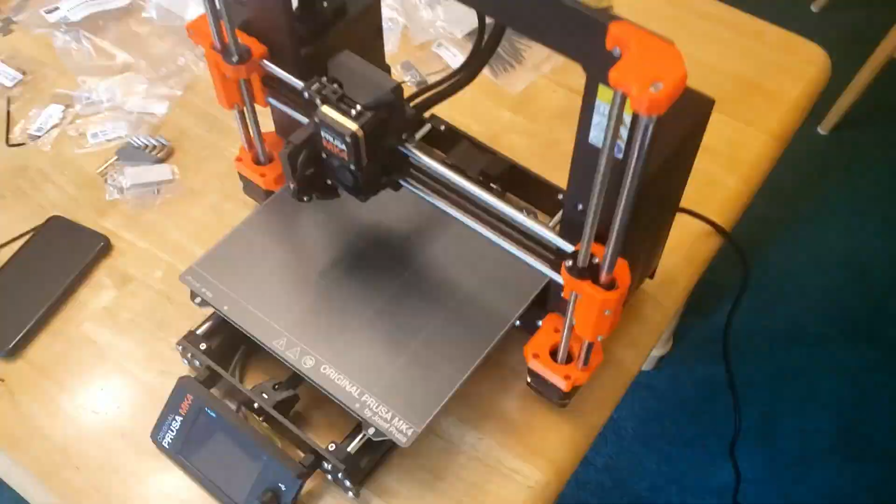Turns out it was actually this zip tie on the back end. So I had to tighten that down a little bit more, rotate it into position, make sure I clipped off any excess, and after getting that all squared away, I gave it another go. This time, thankfully it all passes.

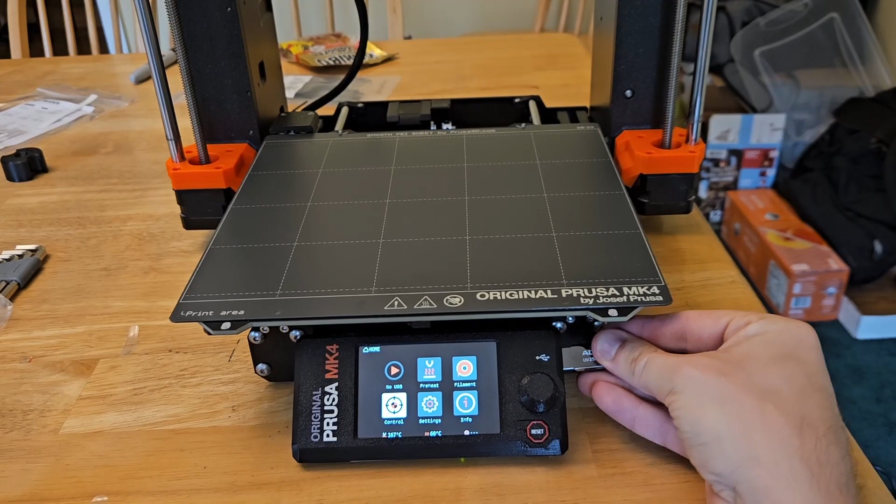I put in the included flash drive, and well, first off, it's a really tight fit, which I've read from people online. If it's hard to put in, I say maybe just scrap the included flash drive and use your own. But not only was it a tight fit, but it wasn't even being recognized.

So I ran upstairs, got a new flash drive, and tried to put that one in. But it didn't work either. So it turns out some of the pins on my LCD board got bent. Maybe it bent while I was trying to force the flash drive in there. Or maybe it just shipped that way. I've seen a few other people online with that issue as well.

Luckily, Prusa support is amazing, and they shipped out a new one. For now, we're going to assume that all works out great. I'm not going to delay putting out these videos until the new board arrives. And I'm sure you're going to find out soon enough as I start doing some more 3D printing videos again.

So yeah, that wraps up this video and the build of the Prusa Mk4. Hopefully you enjoyed this build process along the way. It was interesting trying to film it all and document it. I loved my Mark III, and really hopefully the improvements on this Mark IV here are worth it.